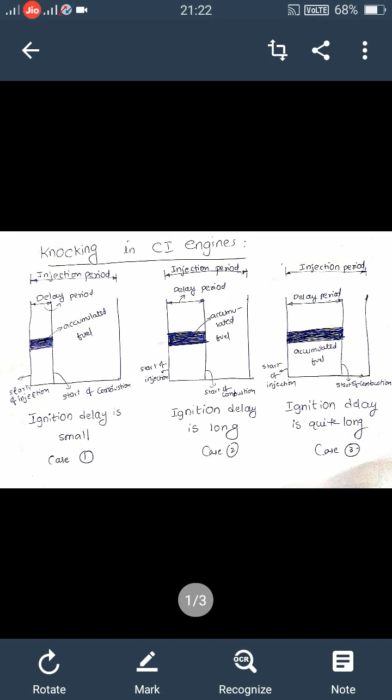On the slide I have drawn three diagrams. In case 1, I took a small amount of fuel which is accumulated in the engine cylinder. With this small amount of fuel we see flame. So the delay period is very small in the first case.

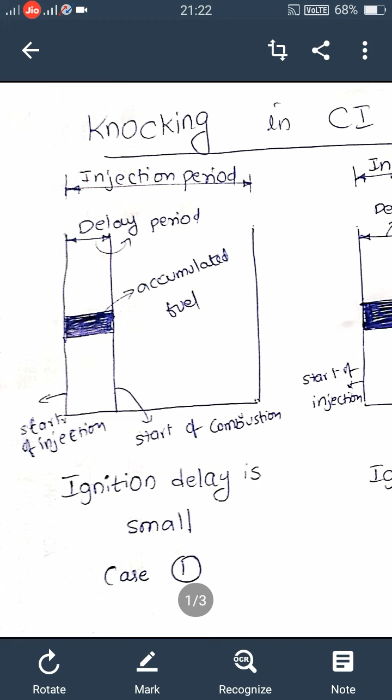The first line indicates point of injection, the second line indicates point of combustion. The gap between these two is called the delay period. In between, I have shown some amount of accumulated fuel. With this fuel we finally get flame. The final line indicates the injection period closing position - end of injection.

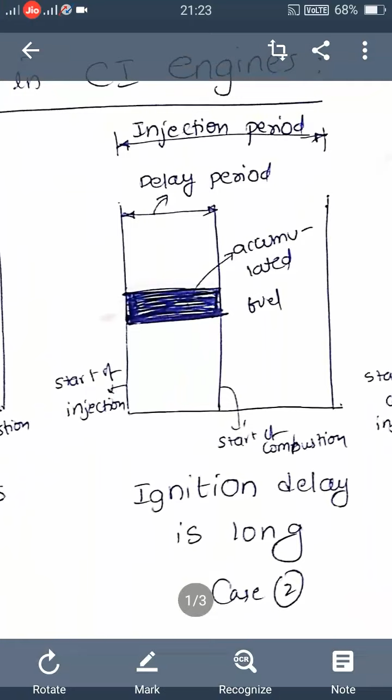In case 2, the ignition delay period somewhat increases - the delay period is long. So when delay period increases, accumulated fuel particles in the engine cylinder automatically increase. So you see more particles in the engine cylinder in this second case.

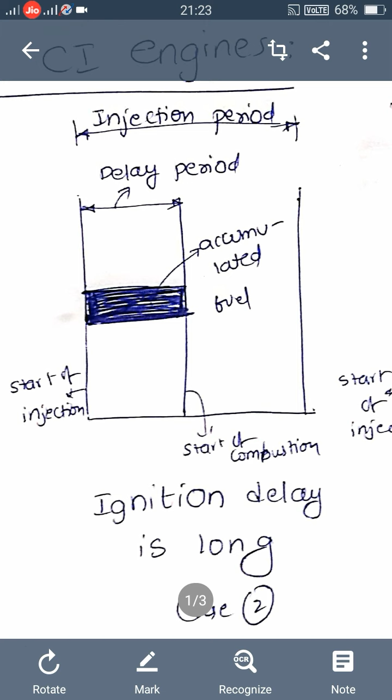In the third case, the delay period is quite long - too much amount of accumulated fuel in the engine cylinder. So when the delay period is very long, the accumulated fuel particles in the engine cylinder are high.

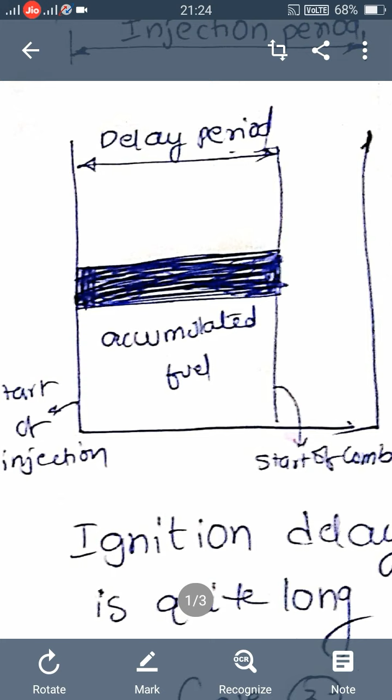How do these three cases affect knocking? I will tell you now. First, if the delay period is smaller, what happens? The amount of accumulated particles is less.

So once flame is generated, the combustion or ignition process goes smoothly, heating the unburnt fuel particles entering from the injector. Since it goes smoothly, the maximum pressure and temperature are attained just beside TDC. So there is no chance of knocking in this case - it is treated as normal combustion.

When ignition delay is long, what happens? In this second case, the fuel particles accumulated in the combustion chamber are more when ignition delay is increased. Because of this large accumulation, as the piston moves upward, the peak pressure develops almost at TDC, because the phase of uncontrolled combustion is more. Due to this uncontrolled combustion, peak pressure develops almost at TDC.

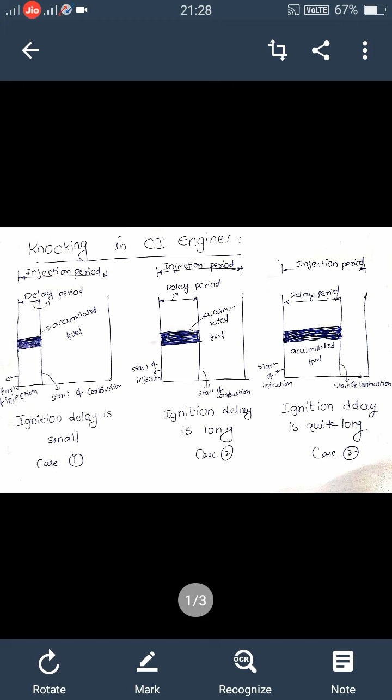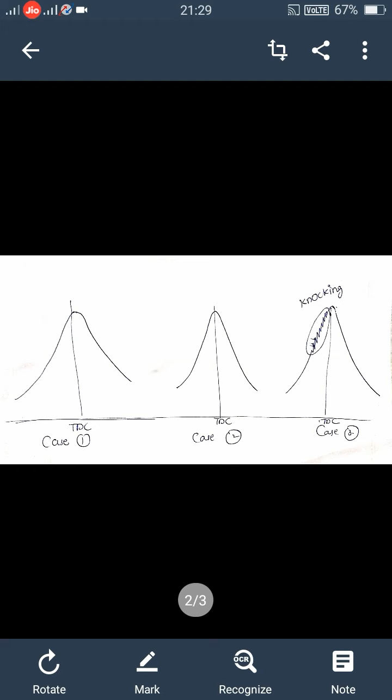What are the factors or characteristics to reduce knocking tendency in a diesel engine? If you want to reduce knocking tendency, as I told you, you should maintain minimum delay period. The following factors help maintain minimum delay period: the engine should have fuel with low self ignition temperature. If I have fuel with low self ignition temperature, it easily reacts with air particles at less temperature, delay period decreases, and auto ignition chances from the other side will be decreased.

High compression ratio decreases delay period, which reduces knocking tendency. Similarly, high inlet temperature - when air is introduced into the engine cylinder during the suction stroke with high temperature, at the end of compression stroke the temperature value will be more. When fuel particles hit air particles, they easily reach self ignition temperature, delay period decreases, which reduces knocking tendency. This belongs to air entering the engine cylinder - when air with high pressure is introduced, after compression it will have a huge pressure rise, so delay period decreases when fuel particles react with air particles.